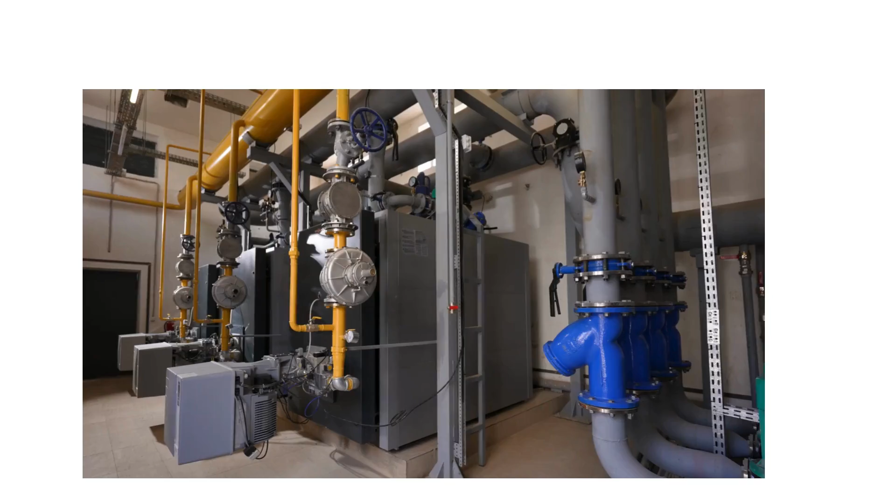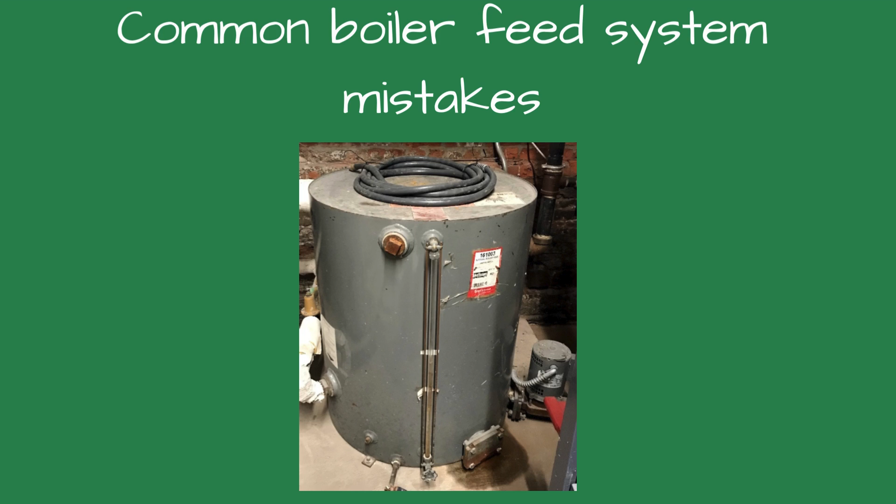This video talks about the common mistakes I see when installing a boiler feed system, so you can avoid these on your next project. The returning condensate should always have a strainer before the tank. Inside the piping, corrosion is occurring continuously. The corrosion is usually caused by air and carbonic acid.

When the steam is off, the pipes are filled with air, and the oxygen thinks it's a buffet. You can tell if it's oxygen pitting when looking inside the pipe and seeing what looks like someone inside the pipe with a tiny drill was drilling into the piping. Carbonic acid is formed when carbon dioxide, a byproduct of steam, meets water. This is usually on the bottom of the condensate pipe, and it washes away the metal, making it paper thin.

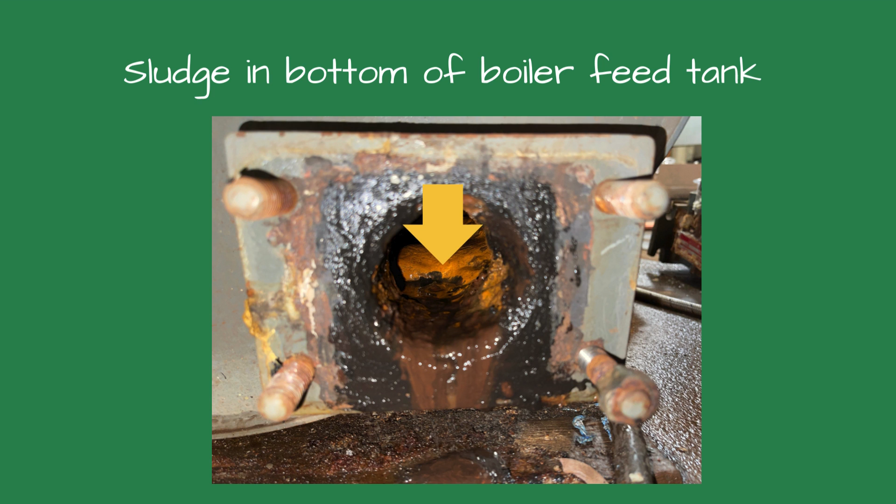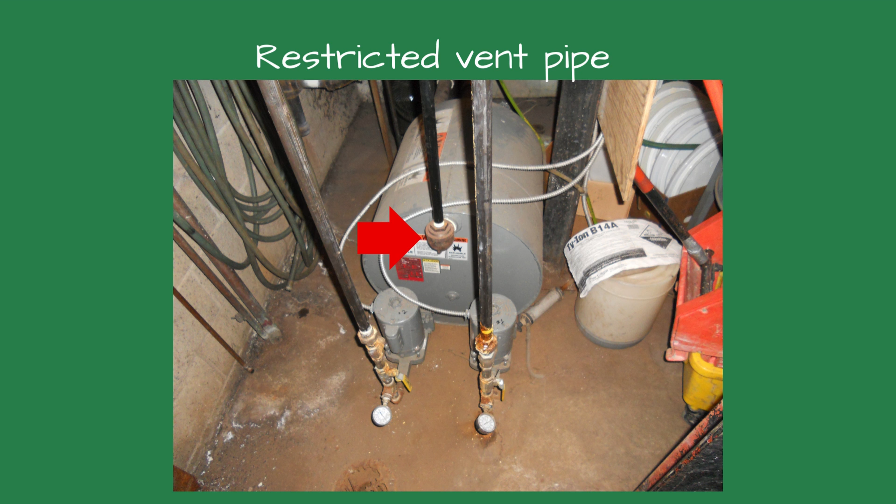Without a strainer, all this rust and mud will end up in the tank and the feed water pump, shortening its life. Some of the rust and mud will pass through the strainer and into the tank. The tank should be flushed once a year with a hose to remove any mud or rust. The vent pipe should be full diameter and never reduced or plugged. The boiler feed tank is not a pressurized tank, but blocking the vent makes it one, which could cause it to explode or even implode.

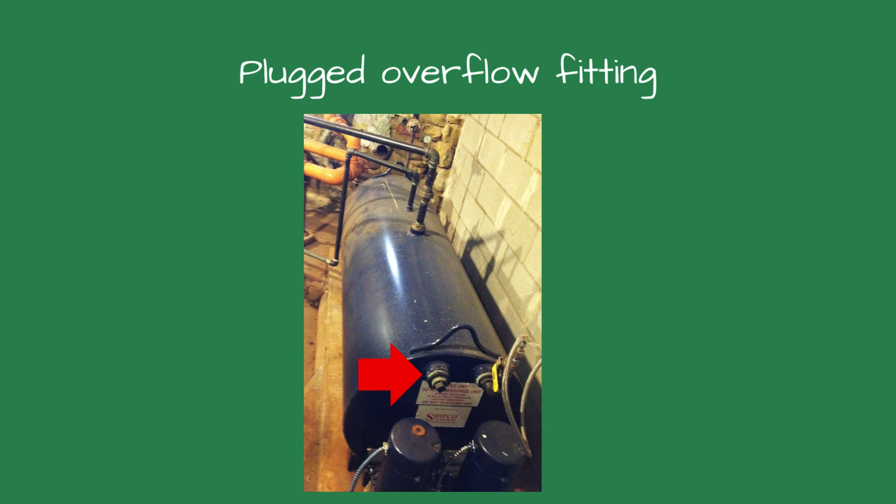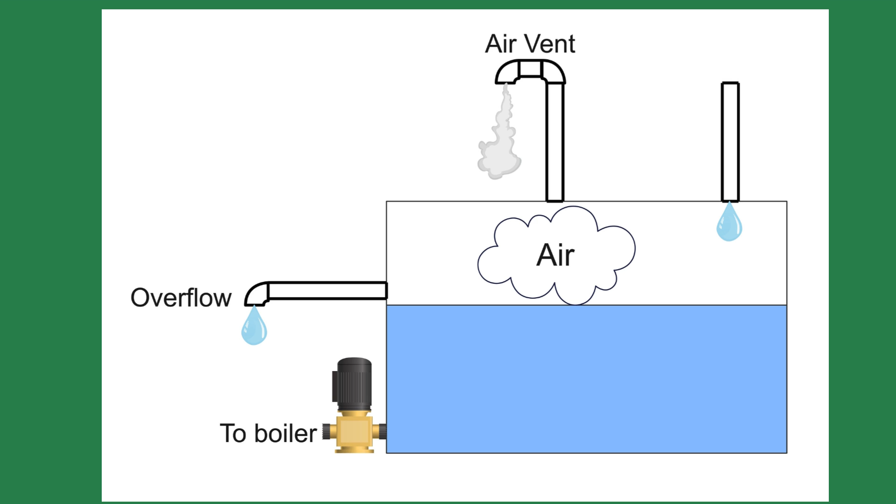The overflow pipe has an important job. Its primary purpose is to ensure an air cushion above the water in the tank. This is needed to allow the system to breathe. When the boiler first starts, all the piping is filled with air. The steam pushes the air into the boiler feed tank, where the air is vented out through the vent pipe. When the boiler shuts off, air rushes into the tank, and the air takes the place of the steam. Without the overflow pipe, the tank could flood and stop the air from entering or leaving the system, resulting in comfort complaints.

The tank and pump should be sized for each project. When reusing the existing tank, verify it is sized properly. A good rule of thumb suggests the tank should be sized for 20 minutes. That is the time it takes from when the steam leaves the boiler to when the condensate returns to the boiler feed tank.

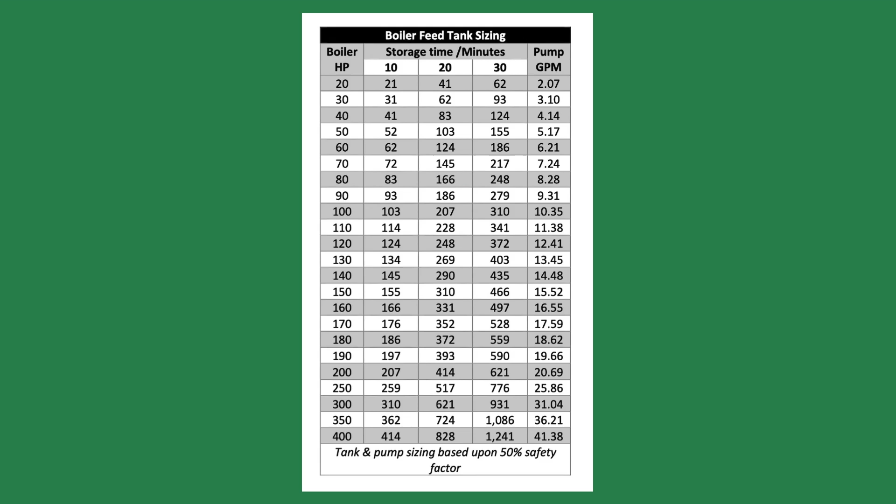When I see a master trap on the system, my first reaction is to leave. A master trap is a trap that's installed in the condensate pipe right before the condensate or boiler feed tank. This is a telltale sign that there are system problems, and these problems will be yours if you get the sale. I add extra money because I know we'll be back troubleshooting the system, and add a disclaimer in my proposal that there are system problems and the proposal does not include the system problems.

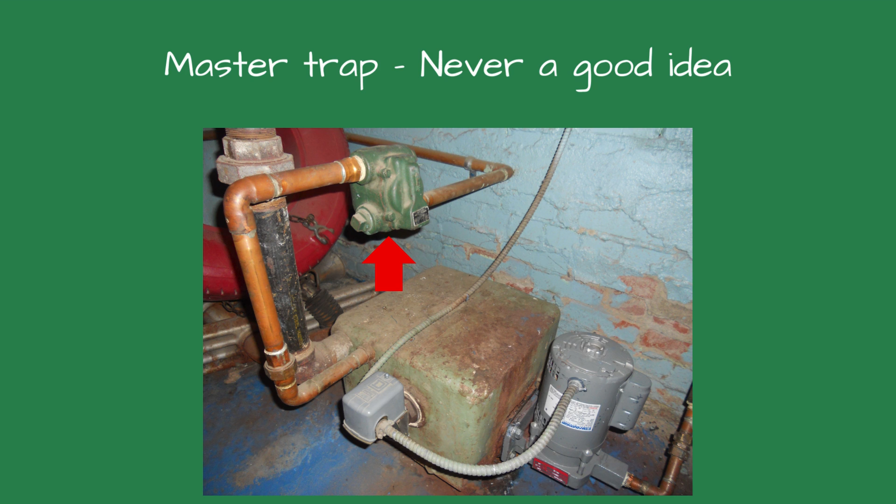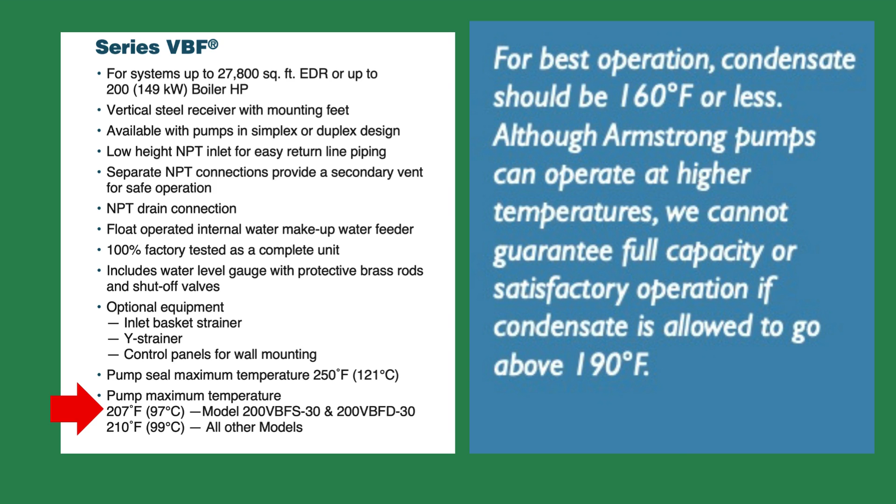The master trap close to the tank inlet could cause problems because the trap discharge temperature will be higher than usual because of the proximity to the tank. This could cause a reduction of the pump capacity or even no flow. When the condensate temperature is too high, the condensate flashes to steam in the pump volute and damages the impeller. The pump can't pump steam, so the boiler will go off on low water.

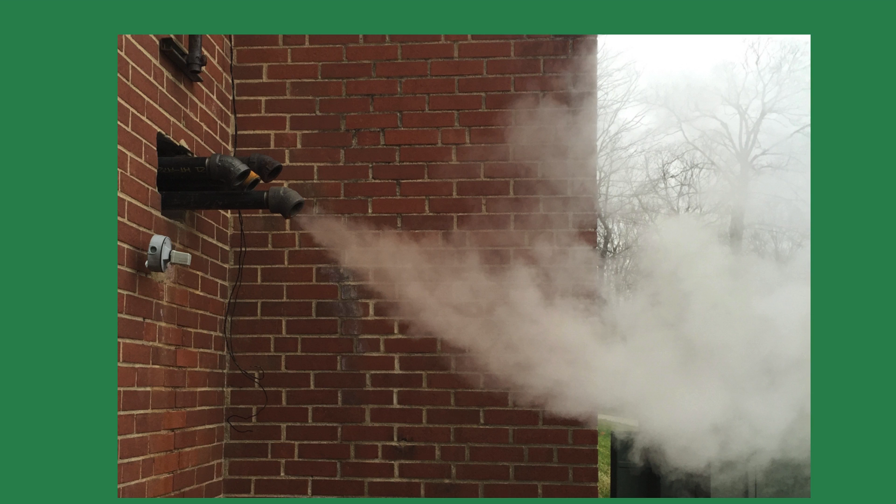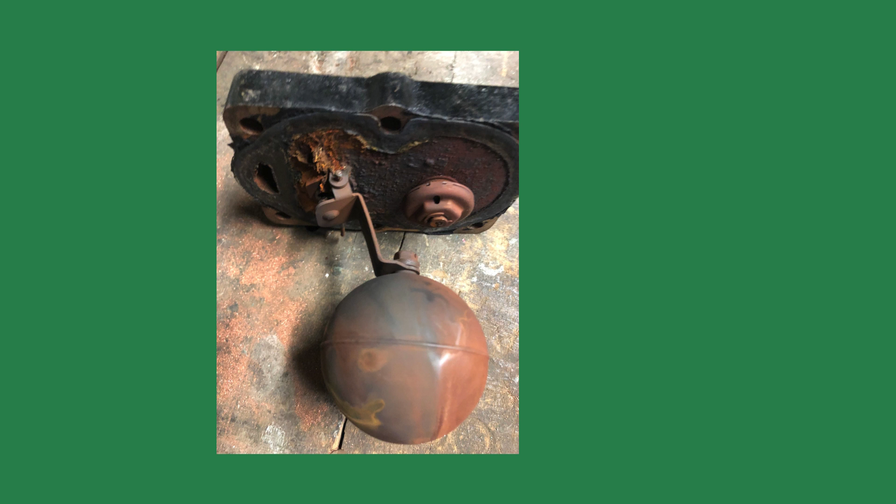One of the fastest ways to destroy a feed water pump is to have steam leaks in the tank. I suggest to the owner that the steam traps should be replaced when the boiler is. The life expectancy of a steam trap is about 10 years, and I would imagine most, if not all, of the steam traps in the building are original.

The pump discharge piping is critical for the system's proper operation. The piping should be sized to deliver the proper GPM of condensate. We had a customer whose feed water pipe was undersized, and the boiler kept tripping on low water cutoff. Their current service company's solution was to install a time delay relay to stop the boiler from going off on low water. In a few years, several of the sections were leaking as a result of installing this.

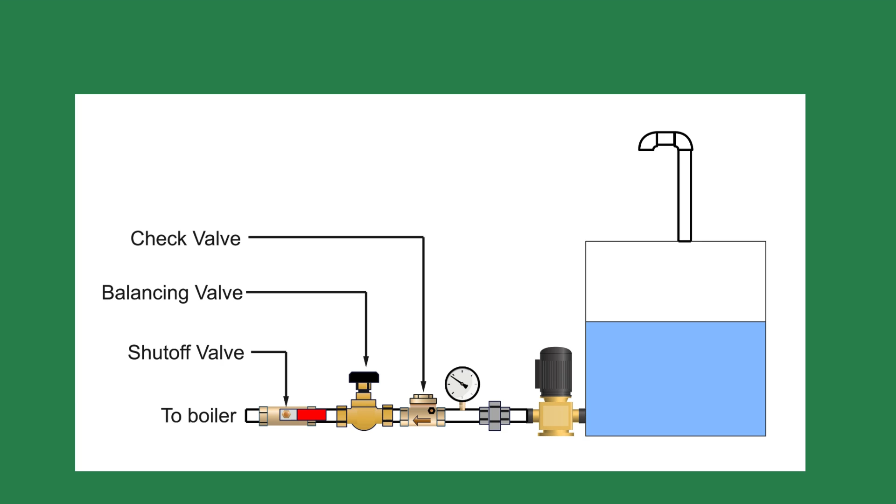The discharge pipe from the pump should have a union to allow dismantling of the pump for service, a shutoff valve, a check valve, and a balancing valve to ensure the pump is supplying the proper GPM. If the flow is excessive, it could flow up the equalizing pipe and cause water hammer.

Consider using a spring-loaded check valve instead of a swing check, as they provide a tighter seal. If the boiler goes into a vacuum, it could pull the water from the boiler feed tank into the boiler, flooding it. The next time the boiler starts, you will have banging like crazy. Wright boilers suggest using 2 spring-loaded check valves on the discharge piping.

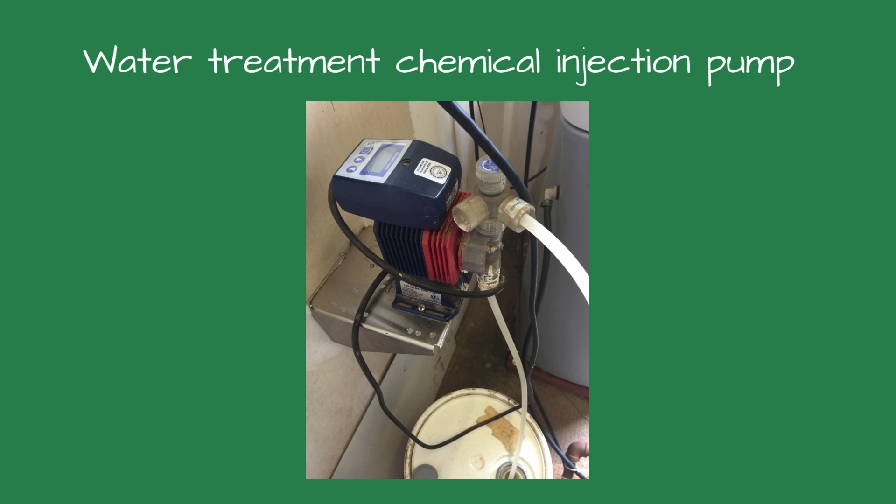The boiler feed tank is usually where the water treatment chemicals are injected into the system. The warranty may be voided if you have a Hoffman boiler feed unit. They want a separate set of pipes downstream of the tank where the chemicals are introduced.

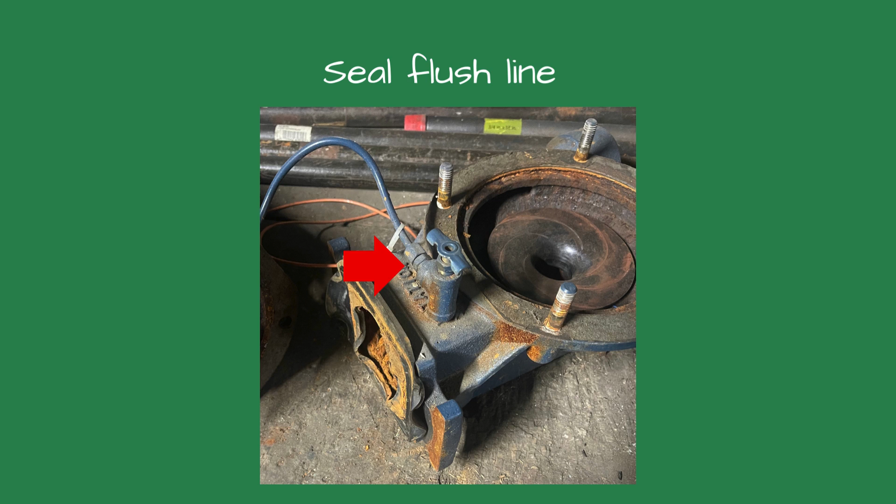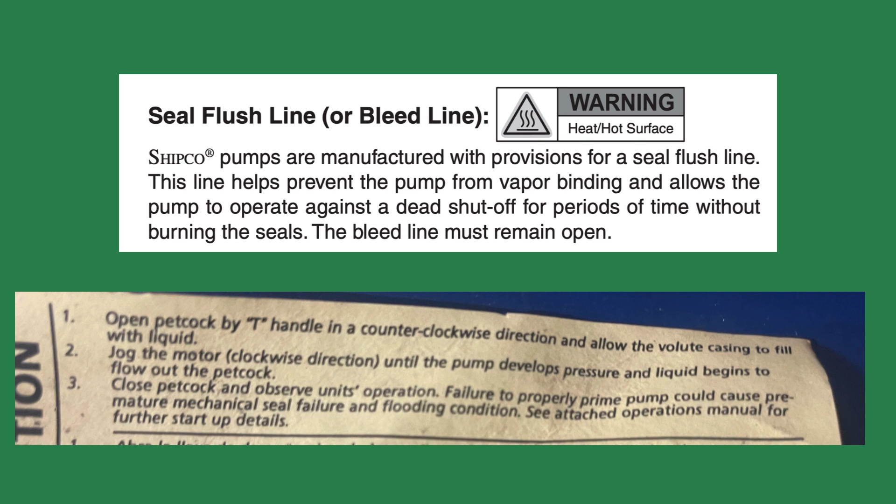The seal flush line is used to get water inside the mechanical seal or to flush the dirt from the seal. It's a 1/4-inch line that's tubing. Be sure to see whether the manufacturer wants it left open or closed. Shipco suggests leaving it open all the time, while Hoffman suggests closing it after the water is inside the seal.

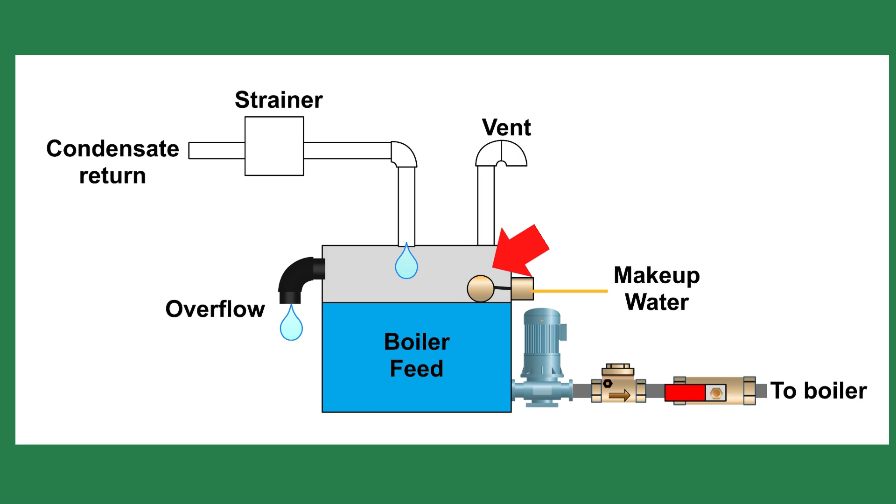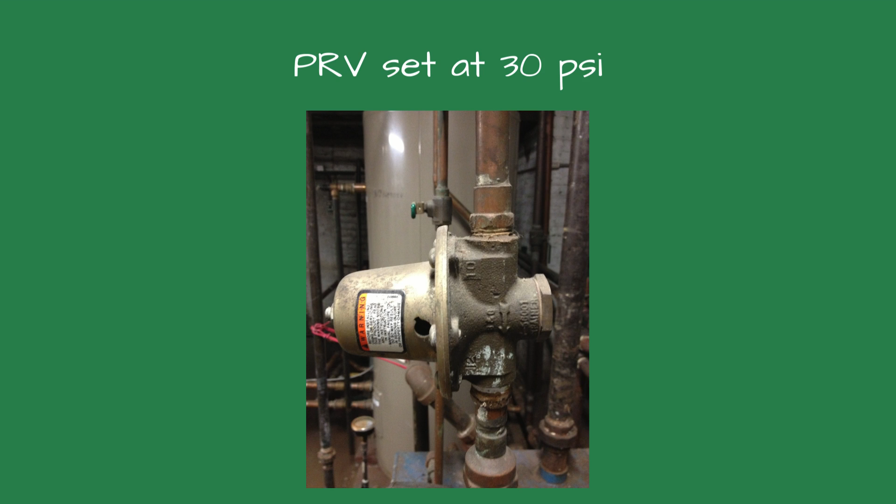The boiler feed tank has an internal float valve which introduces makeup city water to the system. Many manufacturers suggest installing a pressure-reducing valve upstream of the float valve to reduce the city pressure. Most float valves cannot handle the high water pressure, and the pressure will overcome the float valve and flood the tank. Typically, the incoming water pressure to the boiler feed tank should be around 30 psi.

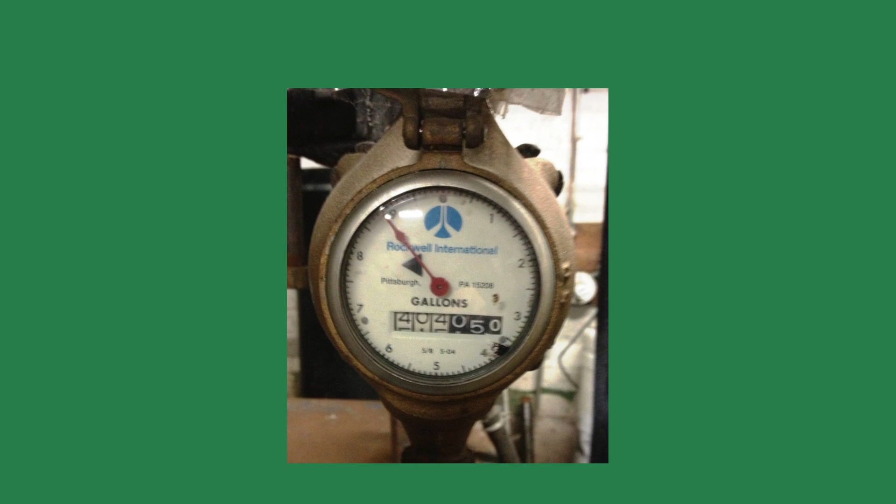I also suggest installing a water meter on the makeup pipe to monitor how much water is lost in the system. Water or steam leaks can destroy a system pretty quickly.